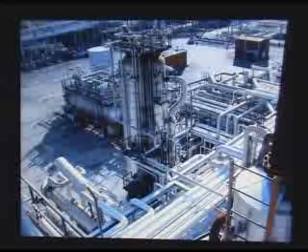So far you heard the scientific part of the presentation, and now comes a much simpler and direct presentation.

We are also involved in coatings and linings, thermal insulation, refractory linings, and fireproofing. This is a picture of a refinery, and you see that insulation is almost everywhere.

So I'll give you a little sense of the value. I talked to our estimating people, and they told me that for a $100 million investment, you pay about $2 to $3 million for the painting.

You pay $5 to $6 million for the thermal insulation. The refractory lining is dependent on the unit. Some use almost nothing, and some have it only in heaters. But then there are other units, like our Claus units, which have expensive and lots of refractory installed.

Fireproofing also depends on the amount of hydrocarbons present in the unit that can get involved in a fire. Having said this, the total investment cost for these items can easily be up to 20% of the total investment cost if you add galvanizing, special coatings, and these kinds of things.

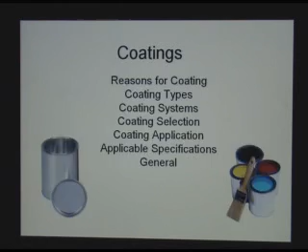The majority of items in refineries is made from carbon steel, as Ardo mentioned. It's a prominent construction material, but it has the disadvantage that it tends to rust and look pretty ugly.

So we are putting a coating on this carbon steel to prevent this rusting. It's really a barrier between the steel and the environment that prevents the chemical reaction that will take place normally between iron, water, and ions, as Adel explained earlier. So this is really a passivating layer that prevents or reduces atmospheric corrosion.

Coatings can be applied to the inside or outside. Inside, we call them normally linings, and they're normally more sophisticated. Then, of course, we paint for the looks.

It is, I think, nicer to work in a well-maintained and painted place than in a shabby old run-down place. But it doesn't work out always. Could you show me the picture?

This is, of course, a sulfur recovery unit, old, a very severe environment, and it's very difficult to maintain this nicely. The steel might have been painted at one time, but it's hard to tell by now. But I think this is daily life in refineries.

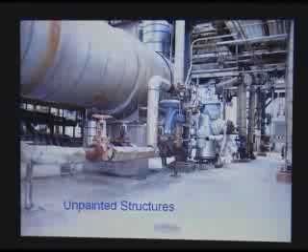On the other hand, this is a new plant, nicely painted, everything nice color scheme. They used black for the hand railings, they used blue hand wheels, so kind of impressive and nice to look at.

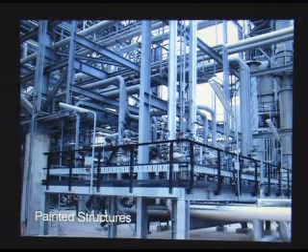And the third reason we are going to paint is for safety reasons or for identification.

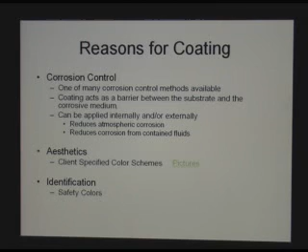There are standard safety colors, which are almost national standards, and the client decides how to apply them to his unit. The local refineries, in this case Chevron Richmond, go into more detail and explain how they're going to label the entire piping system by colored bands.

In some cases, they paint the entire line with a certain color. Here, again, this is the way it looks in real life.

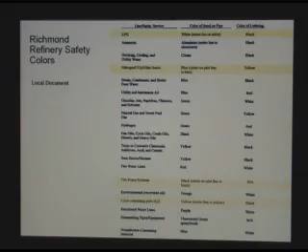Now the painting types. Paint typically consists of a solvent, also called a volatile organic compound, a resin, and a pigment. The solvent keeps the paint liquid in the can, and during application, once it's on the surface, the solvent evaporates, and the resin is left behind with the pigment embedded.

The pigment is in many cases a metallic pigment that acts like the anode for cathodic protection. Most industrial paints are two-component paints - you need a hardener or an accelerator in addition to the solvent.

The solvents or VOCs are controlled by the air quality management people, and they just recently reduced the permissible amount of solvent in the paint to 100 grams per liter, and this gives a hard time to the paint manufacturers. Quite a few paints cannot be used any longer, and we have to find different paints.

Recently we got involved in powder painting, powder coatings, which are typically used only in factories normally, but our client is in the North Slope. He wants us now to use powder coatings under insulation, under the piping, which is a fusion bonded epoxy in this case, but there are many other chemicals that can be used as powder coatings.

There are laminates, which is a combination of a normal paint reinforced with fiberglass, either chopped fiber or a fiber mat. These coatings are pretty thick, durable, and abrasion resistant.

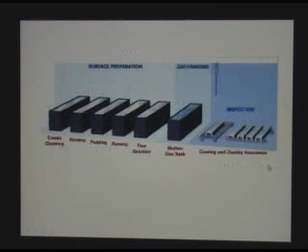A completely different type of coating is hot dip galvanizing. Please click on that. This is a 4-step operation. There's a caustic bath where you put the part in to get all the grease, grime, and dirt off.

You rinse it. The next step is pickling, normally using hydrochloric acid, and this takes all foreign layers off the surface down to bare metal. After this step, it's again rinsed. Then flux solution is applied, and finally it's put into the molten zinc bath, where the molten zinc is deposited on the piece.

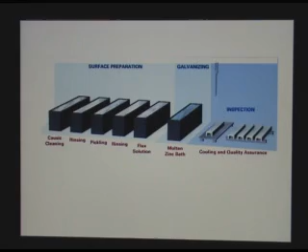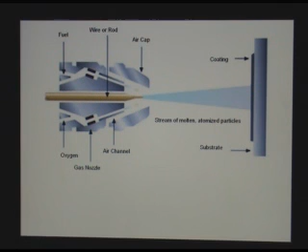Then another method to apply metal to carbon steel surfaces is metal spraying. In the past we used aluminum and zinc, and this process is very simple. Wire rod is melted in a gun, and then the molten metal is propelled with air onto the surface, which was prepared beforehand to accept this metallic coating.

The paints are arranged into coating systems, which is a multi-layer application of paint. Typically there's at least a primer and a top coat, but the preferred method is a primer, an intermediate coat, and a top coat. The top coat is mainly there to preserve the appearance of the coat, to keep it glossy. In this case, we often use urethanes, which have excellent resistance to UV, but epoxies are also used.

All these systems are, of course, temperature dependent, so we have to make a system for each temperature range, and also quite often for location.

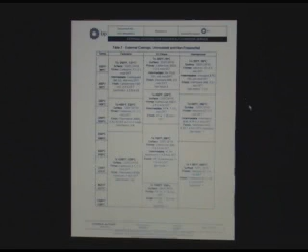Here is a typical client coating system chart. In this case, he allows 3 different paint manufacturers: Carboline, Devoe, and International Paints. On the left-hand side, you see the operating temperature ranges, and then he tells you how to prepare the surface and how to coat it.

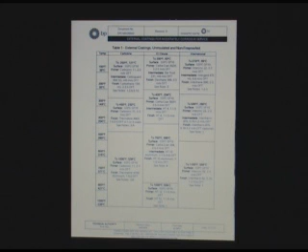As you can see in the Carboline column, there's Carbozinc, Carbozinc, Carbozinc - so the primer is uniform, which makes life easier. You can paint everything with the same primer, and then decide later how to top coat it.

You also have to consider the coating compatibility between the different paint layers. Not all are compatible. This is given by the coating manufacturer quite often.

Linings are applied internally, and they are more sophisticated. They are exposed to higher temperatures typically. They are in immersion service, and it's more important to keep them in excellent condition.

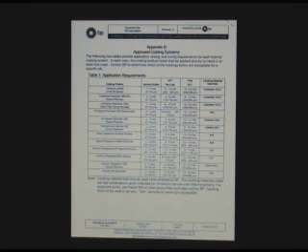And here is, again, our client's view on what to use. In the left-hand column, he gives us the trade names and the generic names of the coating of the lining system, the anchor profile, the dry film thickness, and the total film thickness.

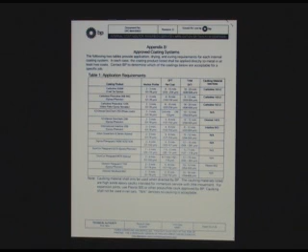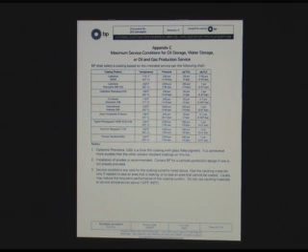Also, in this case, how to apply it by temperature, pressure limitations, and then partial pressure of CO2 and partial pressure of H2S limitation. Here gives another guide for which surfaces these linings are applicable.

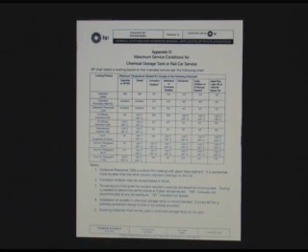It's my turn. So when we select coating, we have to think about chemical resistance, compatibility, temperature limit, damage resistance. Quite often we paint very early in the shop, so we have to transport these things, and they might get damaged during transit. Some paints are better than others for this purpose.

The performance under atmospheric conditions, the regulations. Just recently, most of the paints Chevron has in the catalog cannot be used because they have too much solvent in the paints.

Once in a while we think about economics, and then the application methods, and of course client preferences, what the client wants he gets, as long as it's reasonable and technically okay.

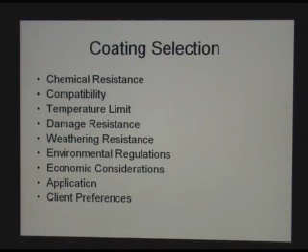Here's the economic part of it. Occasionally we have to do a life cycle cost analysis where we balance the installation cost plus the maintenance cost versus benefits over the lifetime. It is quite often the case that if you spend more money up front, overall you gain money by not having to paint so early again.

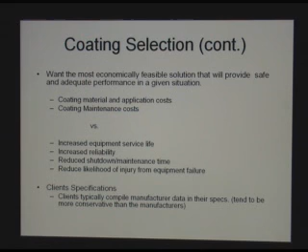The client specifications we use frequently are really also a copy of the manufacturer's data requirements, and they tend to be a little more conservative than the manufacturer's specification.

Coating application is really a two-step process. We have to prepare the surface, make it clean for the paint, and then apply the paint.

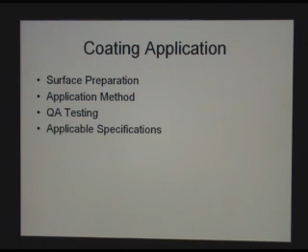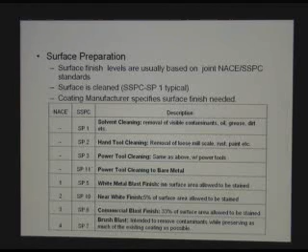Here is cleanliness specified, given by NACE standard and also by SSPC, which stands for Steel Structure Painting Council. You see here that abrasive cleaning methods are 7, 6, 10, and 5 by degree of cleanliness.

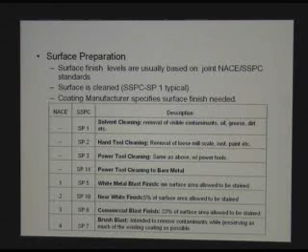It goes from just a brush-off blast cleaning to a white metal blast finish. The tool cleanings go from SP2, which is just a hand tool cleaning, wire brush, chipping tools, over power tool cleaning. There's a method now, SP11, which cleans to bare metal. All cleaning operations are normally preceded by SP1 to remove all oil and grease and these kind of things.

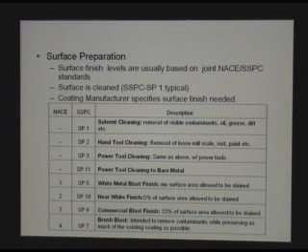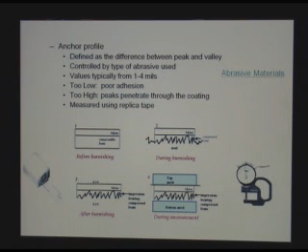The cleaning results in an anchor profile, which is typically 1 to 4 mil thick, which is the average distance from the top to the bottom of the valleys. It's important for the paint's performance.

Too low might be poor adhesion. Too high, the peaks might stick through the paint and you get rust bloom again. This is measured during inspection with a special tape which is impressed over the surface and then measured with a caliper to get the right thickness or the right range of profile.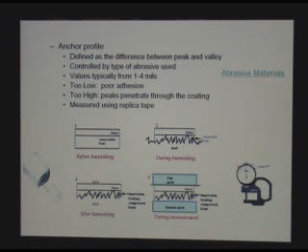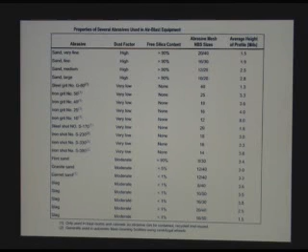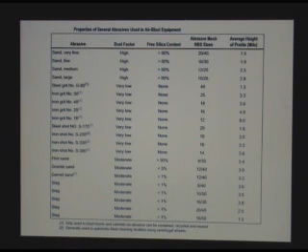Can you click on abrasive? Here's a list of abrasive that can be used for abrasive blast cleaning. It's not complete, but it's a good portion of it. I remember a job where we used crushed walnut shells to clean because it was the only abrasive we could use to clean the surface gently.

The paint is applied typically by airless spray, by brush or roller. Airless spray is what we prefer because it's the fastest method. But in the field, quite often we cannot do this because of concerns over overspraying other items. So quite often we have to brush paint entire plants with a much slower method.

We try to apply our paints in the shop as much as possible because it's less expensive overall, even though you have to allow for additional expenses for touching up the shop coatings in the field. But of course, there are some coatings which only can be applied in the shop.

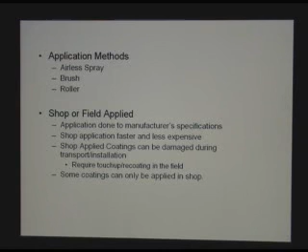Here are the testing requirements. There are many more than this, but here are some typicals. Typical is holiday testing, where we test the surface for any pinholes and imperfections. It's an electrical resistance test. We test for the dry film thickness, which is the thickness of the film after it has dried. And then the other tests like air temperature, dew point of air, surface temperature, ambient temperature.

We test to make sure that the air used for blasting is oil-free. We also test adhesion once in a while or other items.

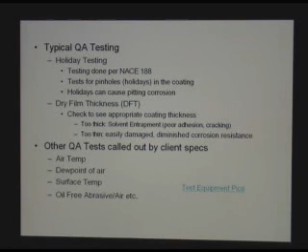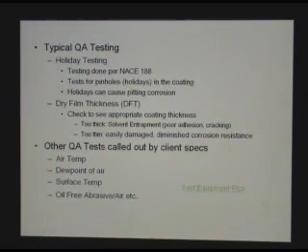Again, we are using our client specification most of the time, but occasionally we have to write our own.

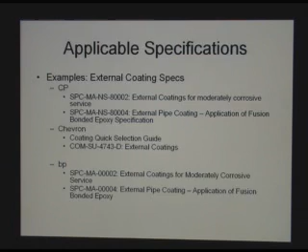In general, carbon steel is the most used material in refineries. Exposed steel is typically coated. We paint under insulation only if the temperature is low. At high temperature, we don't paint because there shouldn't be any water. Stainless steel is not painted. However, it's painted under insulation to prevent chloride stress corrosion cracking.

I think that was part of coatings. Now we go over to insulation.

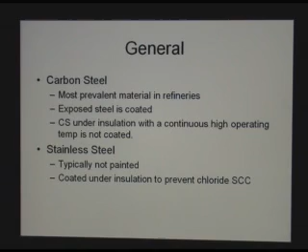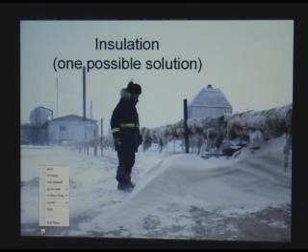Can you go back to slide 2? However, our insulation looks like this, which is, of course, an insulation material and a weather jacket on top. This is a typical application method used in the United States and Canada.

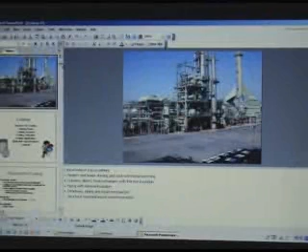This one here, I can tell from looking at it, it's overseas, most likely Australia or New Zealand. They're using a slightly different method of doing the sheet metal work. Can you go? Yes, next one. Okay.

The reasons for insulation, there are some benefits. It can reduce the heat gained or lost to the environment. In reality, any of our refinery processes will work without insulation, because the heat transfer inside the unit is so big compared to the losses over the uninsulated surfaces to the outside. However, if you look only at the heat loss from the surface to the ambient, you save about 95% of the heat, so insulation is quite effective there.

It helps with process stability. I remember a case where we couldn't finish the insulation. It was a hot process, and the unit got into a heavy rainstorm, and they couldn't control it because the temperature changed too fast and too drastically.

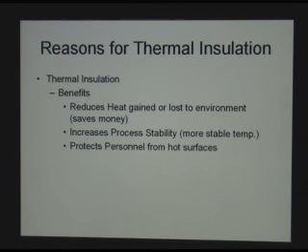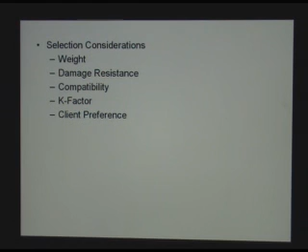And of course, insulation protects people from hot surfaces. When we select insulation, we consider the weight, because it's a factor in the stress analysis of piping. Damage resistance - there are many cases where the insulation was damaged before construction was complete. We make sure materials are compatible amongst themselves, but also compatible with the surface to be insulated. Very important is the K factor, or thermal conductivity, which determines the insulation value of a material. And again, client preferences - clients have their own opinions about what to use and not to use.

I think here we have categorized the insulation by types, by insulation type codes. We have hot insulation, typically used for heat conservation. Then there's a special kind of hot insulation where we have electric tracing or steam tracing involved, which is a heater on the pipe or on the equipment under the insulation.

We have cold insulation, which reduces the heat transfer from the ambient to the system. This includes a vapor barrier to make sure that we don't get water into the insulation and don't form condensation on the insulation. We have personnel protection insulation, that's the safety issue. We use acoustical insulation, which reduces the noise from the surface, and is quite often combined with heat conservation or cold insulation.

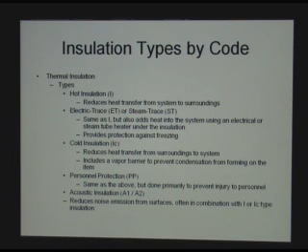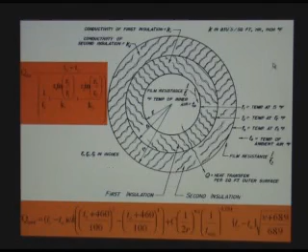We have to optimize insulation thickness. There is the economic insulation thickness. Can you show the graph, please?

Can you go back? This sounds pretty simple. However, on the heat loss side, we need to know the fuel costs, and they change all the time. We have to know the investment, cost of money, interest, depreciation, maintenance, number of operation hours. All these things are kind of iffy quite often, so the entire thing becomes more or less a good guess. On the insulation side, it's the investment cost, and again, when we do this analysis, it's very early in the project and the prices are not firm. So the entire thing is a tool to find something which is reasonable, but it's not really a scientific approach.

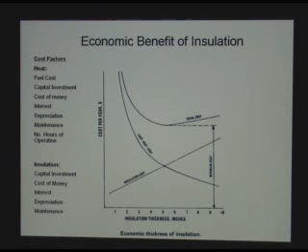Let's go back in. Okay. Quite often we have to limit the heat loss to a certain value from the insulation surface. Another optimization is to extend the cool down time of the fluid being insulated in a pipe or a vessel, and we have to limit condensation in steam systems. On heat traced systems, it's the same type of thing. In addition, we can optimize the number of tracers versus a thicker insulation, so in some cases you might want to insulate thicker and save a tracer and be overall ahead.

And on this heat traced system, we have to balance the heat input from